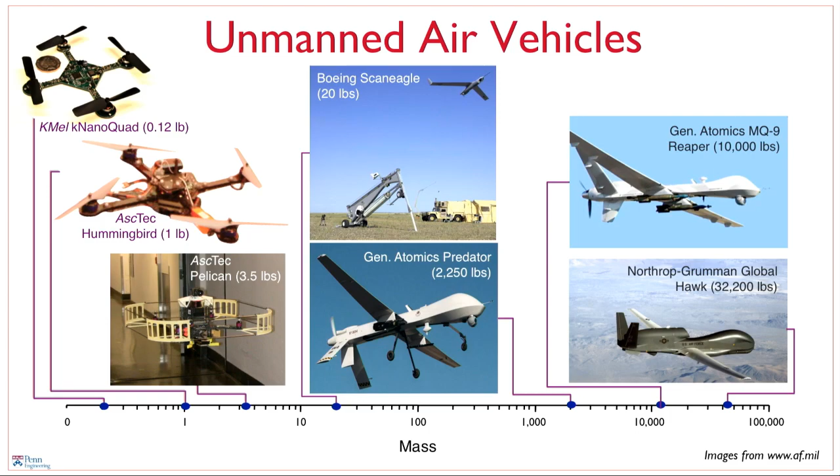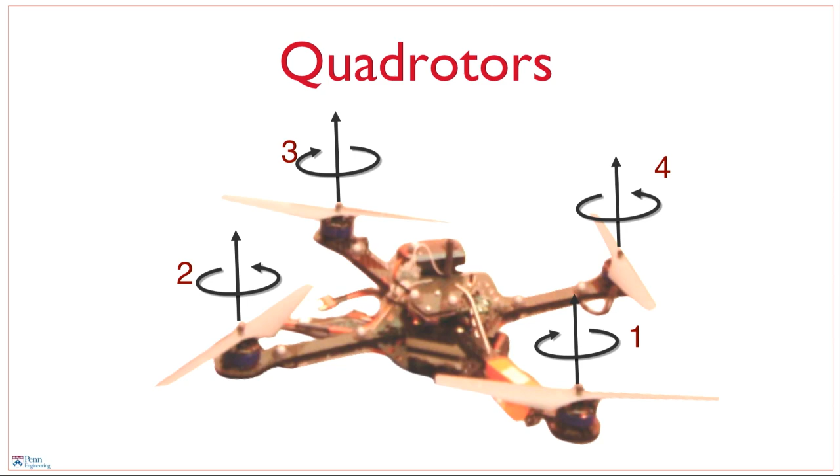All these robots on the left side are called quadrotors, because they're helicopters with 4 rotors. If you rotate all motors at some nominal speed, the lift generated by these rotors compensates for the weight and the robot hovers. On the other hand, if you carefully control these speeds, you can get the robot to roll, pitch, and yaw, and fly in whatever direction you want. The smallest robot we have weighs a little less than 75 grams, is about 21 centimeters in diameter, and consumes between 10 to 15 watts of power.

Robots like this can be used for emergency response applications. Imagine a 911 call in a building like this, and the first responders on the scene are robots. They gather information and provide it for human rescue workers who might come much later. They can also be used for search and rescue - these are pictures of our robots in Sendai, from experiments following the earthquake in March 2011. You can see their ability to fly in collapsed buildings, take pictures, and send information back to human rescue workers.

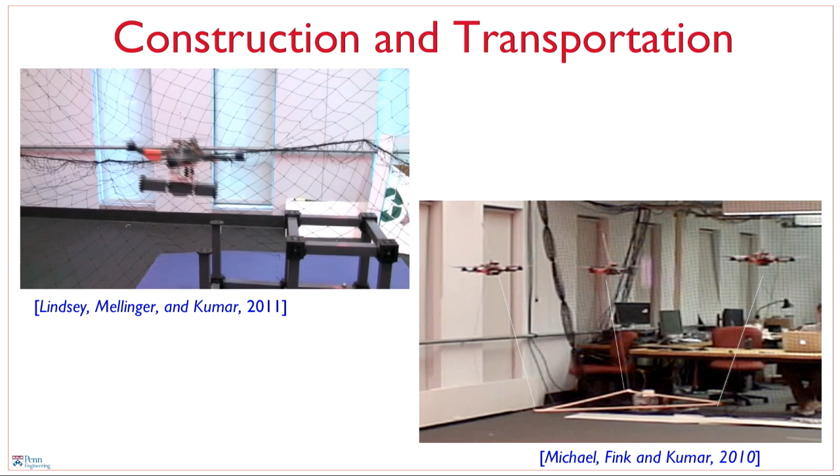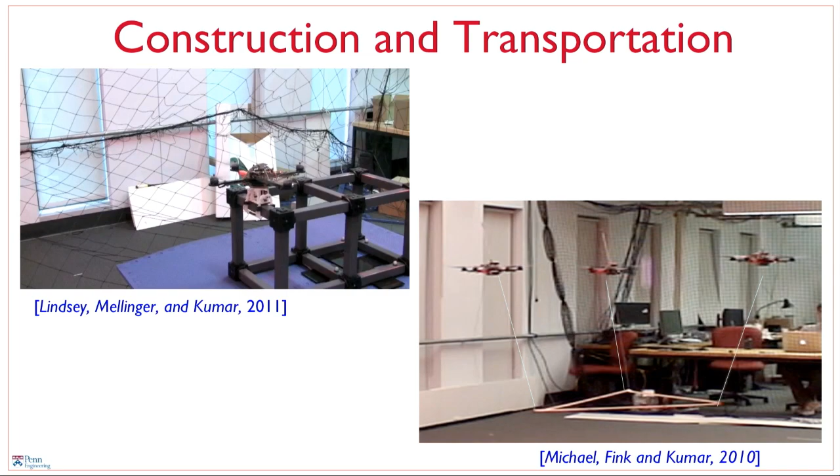You can also use these robots for construction and transportation. In the video on the top left, robots assemble truss-like elements with magnetic rods, forming 3-dimensional structures. This is only a laboratory prototype, but you can imagine bigger robots performing construction tasks on a larger scale, or even smaller robots, as you see on the bottom right. If you build smaller robots, the payload is going to be smaller, but you can get these robots to collaborate to pick up larger payloads.

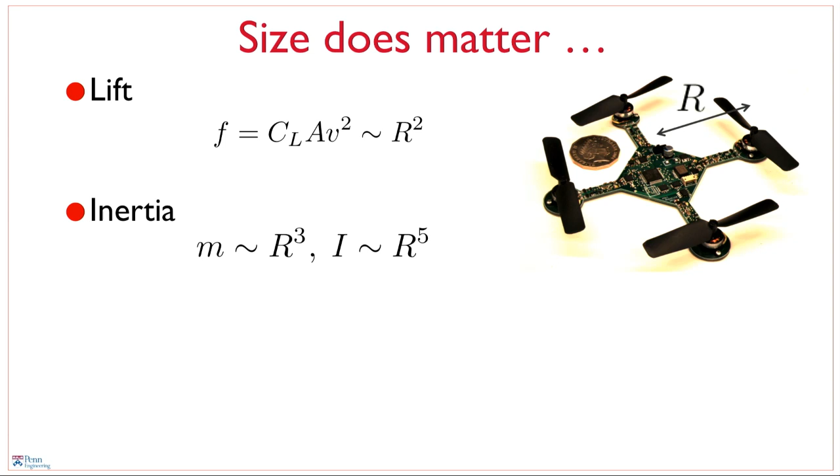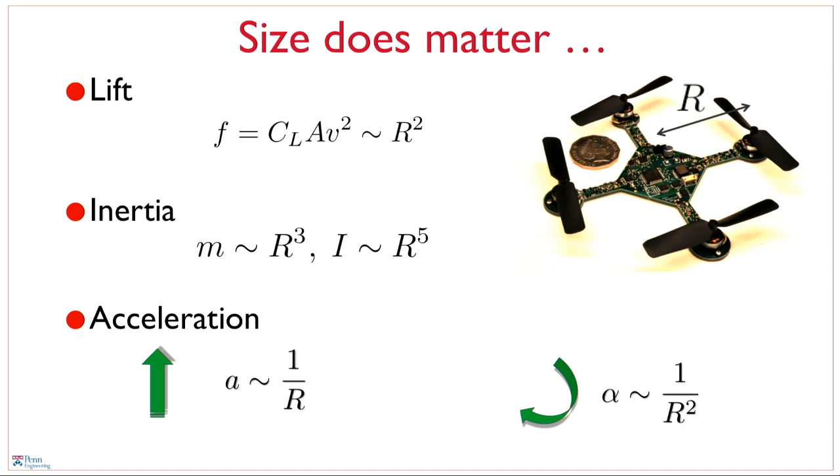Size does matter. If you take the characteristic length R of a robot - now I'm allowed to use mathematical symbols since we're all geeks here - we know that lift scales as the square of this length, but inertia also scales as powers of R. If you make R smaller, say by a factor of 2, the lift drops by a factor of 4, the mass drops by a factor of 8, and the inertia drops by a factor of 32. So when you compute the acceleration from scaling down, the linear acceleration actually increases - it goes as 1 over R - and the angular acceleration even more so, going as 1 over R squared. You get 4 times the angular acceleration as you scale down the length by a factor of 2. This works to our advantage: as we build smaller and smaller robots, those robots become more agile.

What you see in this video is one of our smallest robots doing flips, double flips. The single flip can be performed in half a second, and the robot accelerates from hover position to a maximum angular speed of 2,000 degrees per second in less than a quarter of a second.

All this is possible because an onboard computer carefully monitors signals from an onboard gyro and accelerometers to stabilize the aircraft to hover. One of the co-inventors, Daniel Mellinger, throws this robot into the air, and you can see this robot recover no matter what position it's in and return back to him safely.

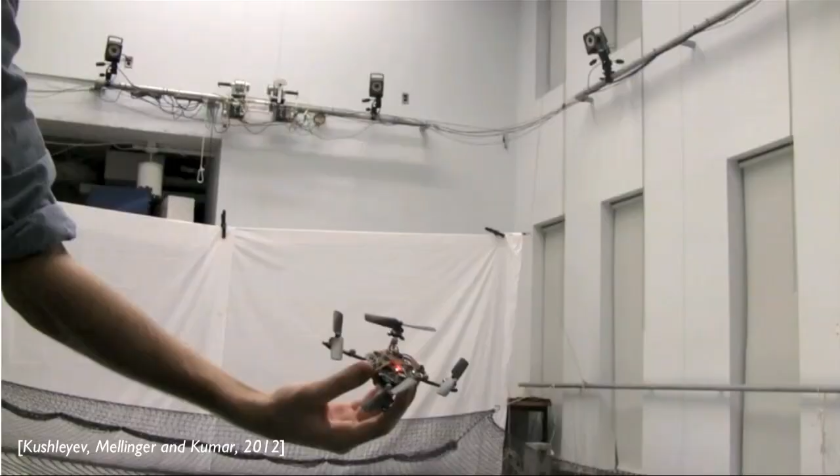We want to take robots like this and make them autonomous. A key issue you have to deal with is motion planning or path planning: how do you get from point A to point B? Here's a schematic showing a 12-dimensional picture, which I can't really draw. But the idea is that if you look at the dynamics of a robot like this, it's complicated, can only be described in a 12-dimensional space, and further, this space is curved. It's curved because when you write down the equations of motion, they have all kinds of nonlinearities.

What we have to do is plan motions for this in real time. If you consider going from point A to point B, and you want to perform all these computations on onboard processors, this is quite hard. So there's a trick that allows us to transform this 12-dimensional space into a flat 4-dimensional space. In that 4-dimensional space, all you have to worry about is the position x, y, and z, and the yaw angle. If you can find sufficiently smooth trajectories in this 4-dimensional space that avoid obstacles, it's possible to transform that back to the 12-dimensional space. This is the trick our robots use to plan motions in real time.

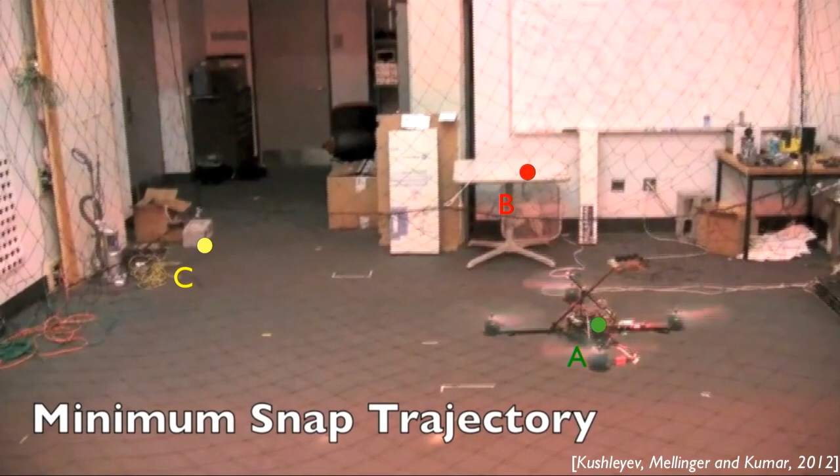What I want to show you is some examples of experiments using this strategy. In the first video, you'll see this robot going from point A to point B through an intermediate waypoint C. The trajectory planned is aggressive. It starts from a hover position, and you can see the rolling followed by the pitching, which it has to do to stop. In this flat space, it's pretty easy to find these trajectories, but when you transform it back, you get trajectories like this. This is done autonomously.

The feedback is obtained from a motion capture system overhead that provides real-time information 100 times a second. But this planning is done at 20 hertz—20 times a second, you can calculate these minimum snap trajectories, which are smooth trajectories that minimize the fourth derivative of position to find the right paths.

Another thing you can do is have them go through obstacles. The robot knows precisely where the obstacles are because of the motion capture system, and it plans paths through these obstacles with remarkable precision. It doesn't matter if these obstacles are moving—as long as it can predict the motion of the obstacle, the robot can plan paths through them, again in real time.

It gives you a new appreciation of the phrase jumping through hoops, doesn't it?

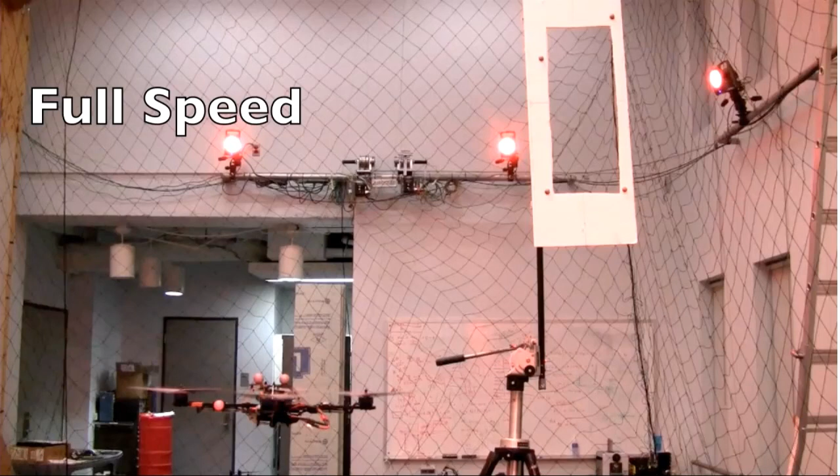I want to show you another clip where the robot is confronted with a window that's only 3 inches wider than the robot's height. What you have to do here is take examples of trajectories you've learned before and stitch them together. I want you to compare this exercise to what an Olympic diver has to do when she jumps off a springboard to gain energy, then twists her body into the somersault, and then recovers gracefully.

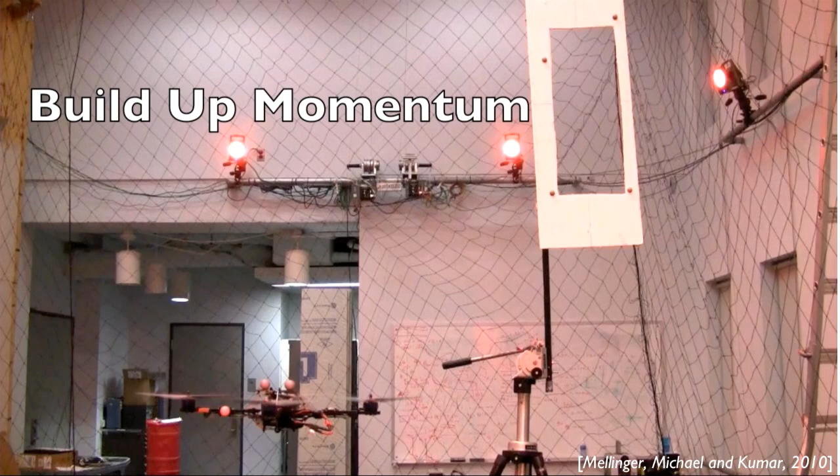What this robot does is start from a hover position, then twist its body to go through this window, and then recover. There are four distinct phases integrated together: building up momentum, changing orientation, reversing orientation, and then switching back to hover. These trajectories are stitched seamlessly in real time in response to obstacles that are confronted.

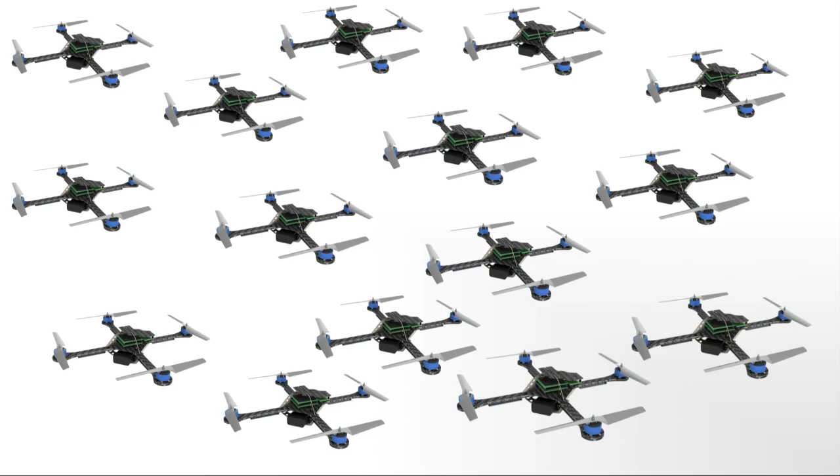I want to switch gears a little bit and talk about one of the limitations of scaling down, which is really this issue of size. What we really want to do is get lots and lots of robots to collaborate if you want to carry payloads. Now, these payloads might be objects that you want to transport, or sensors that you might want to use to map the environment. Cooperation is a fundamental aspect of all of this.

There are 3 things that I'll submit to you that are similar to ants, these birds, and to our robots if we have to make them cooperate. First, they operate just based on local information. It is not possible—there are 4,500 people here. I guarantee you that the person at this extreme doesn't know what the person at the other extreme is doing. So you have to act based on local information.

Secondly, you have to act independently. There's no one who's going to tell you exactly what to do in order to accomplish this cooperative task. And then finally, there's got to be this notion of anonymity. What I mean by that is an individual has to be agnostic to who her neighbor is. That's very important if you want to perform a collaborative task. So the ants have no identities. The robots don't care which robot is next to each other.

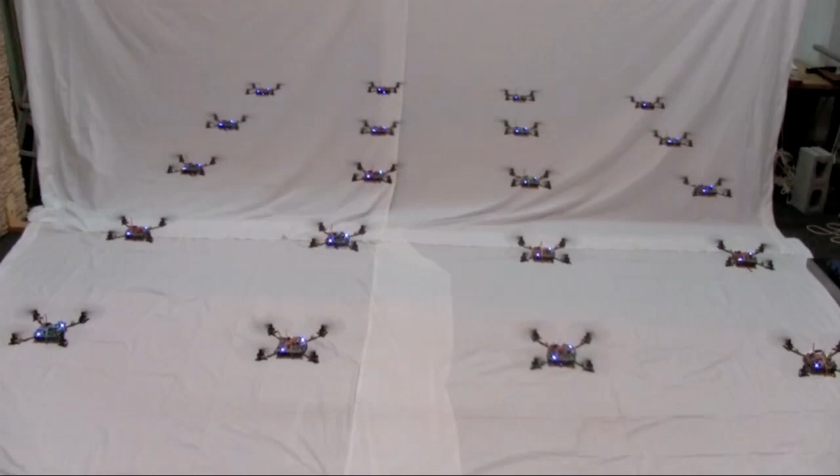I want to show you a video that we've just created. This was about 6 months ago, which shows the biggest indoor swarm that we've managed to create. These are the really small robots that I told you about. There are 20 of these flying in formation. They're all aware of their neighbors. They all solve this problem of going from A to B, but they're told by the human operator to create these formations.

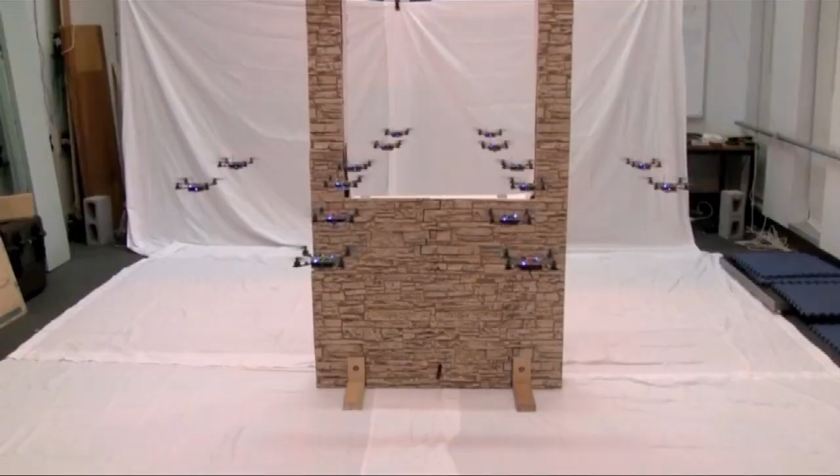These robots create these formations in a safe way, keeping track of their neighbors. These formations can be 2-dimensional, 3-dimensional. They can change dynamically to go through obstacles. And again, the control has to be very, very precise, as you see in this video, where they traverse a figure-8 pattern.

These robots come within inches of each other, and you can imagine the level of precision that's required because they're buffeted by the aerodynamics of their neighboring vehicles because of the downwash from the rotors. So this is an example where the robots are just creating formations. It makes for a cool video.

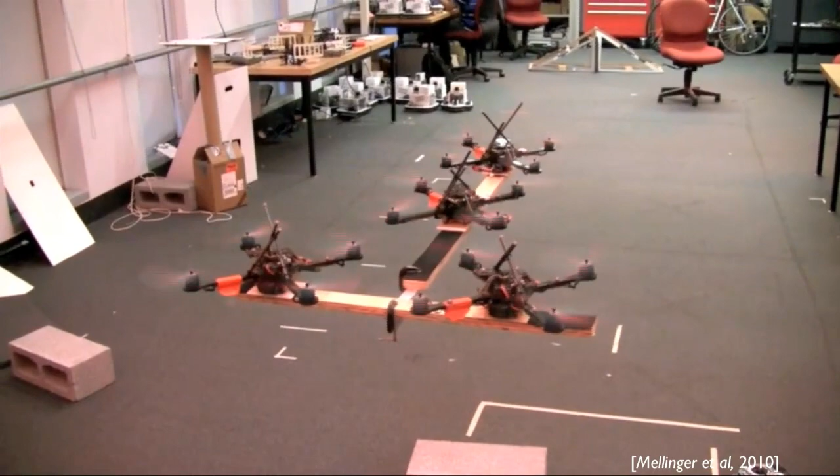But what we'd really like to do is to get them to collaborate to carry objects. And so here you see teams of 4 robots carrying payloads that individuals simply could not have carried. Now here there's a disadvantage: you can see if you group many robots together and have them carry one big payload, the overall inertia of the system actually increases and the maneuverability decreases. But what you gain here is, again, the ability to carry larger payloads.

Here you see these robots actually collaborating on identifying a piece of a 2x4 and then figuring out how to grasp it. These are grippers made out of composites with inlaid fish hooks, which allow you to sort of dig into these 2x4s to pick it up, and they're able to move.

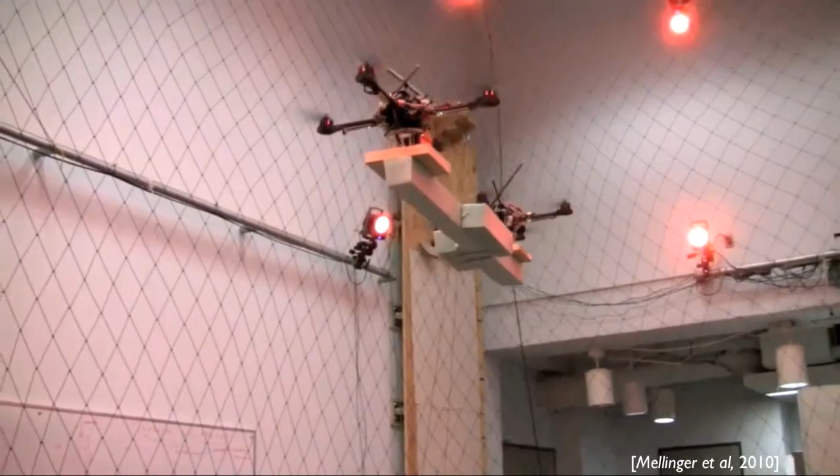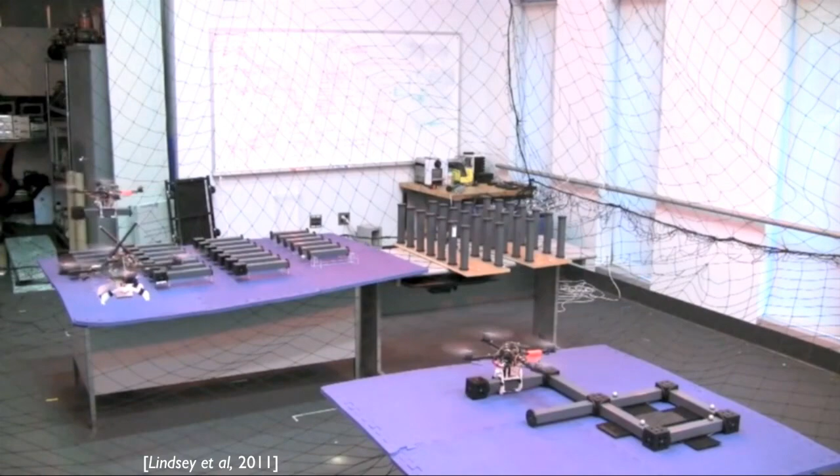The next example I want to show you is an example of construction. So here there are 3 robots that are assembling structures based on blueprints that look roughly like what you see in a Lego instruction booklet. The robots are told what the pattern needs to look like, the 3-dimensional structure. The robots decide which robot is going to pick up what part and assemble it where.

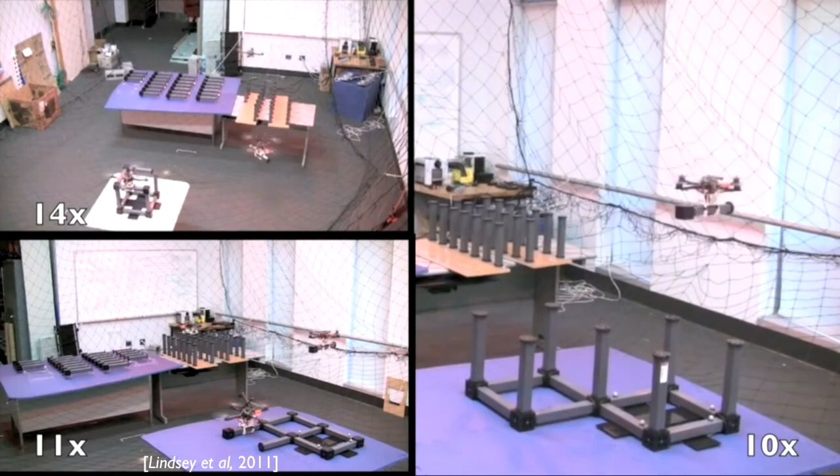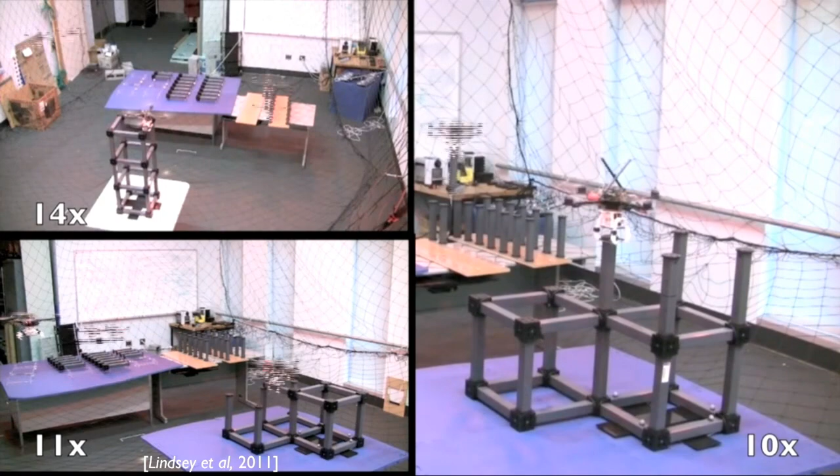And here you see, fast forward, 3 experiments where the robots essentially build 3 different 3-dimensional structures. Again, the high-level specification is very simple, but the robots make all these decisions on their own in order to satisfy that high-level specification.

In all these videos, one of the things you would have noticed is this network of motion capture cameras. This makes for a very special piece of infrastructure, and if these robots have to leave the laboratory and go outside, it's hard to do. So we've been working on figuring out how to get rid of that infrastructure, how to eliminate the need for it. Here's our first attempt to do that.

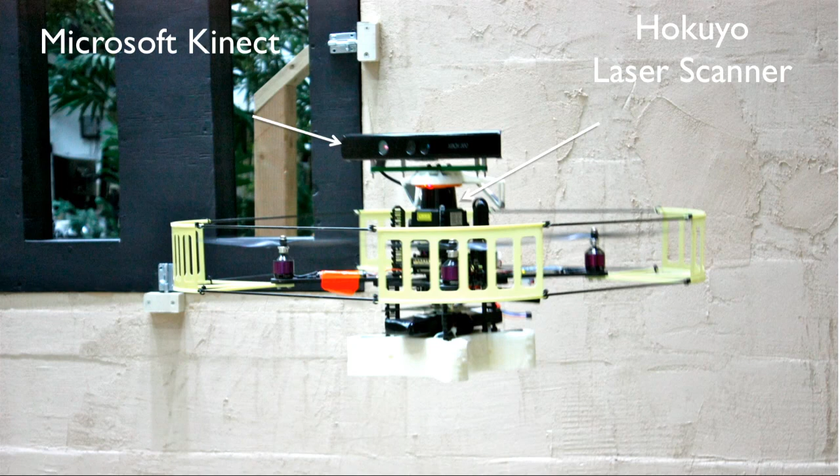This robot has two pieces of hardware. One is a laser scanner that produces a 2D cloud of points at a 270-degree field of view out to about 30 meters. The second is an off-the-shelf Microsoft Kinect RGB depth camera, good between 3 and 5 meters out with a 40 degree field of view.

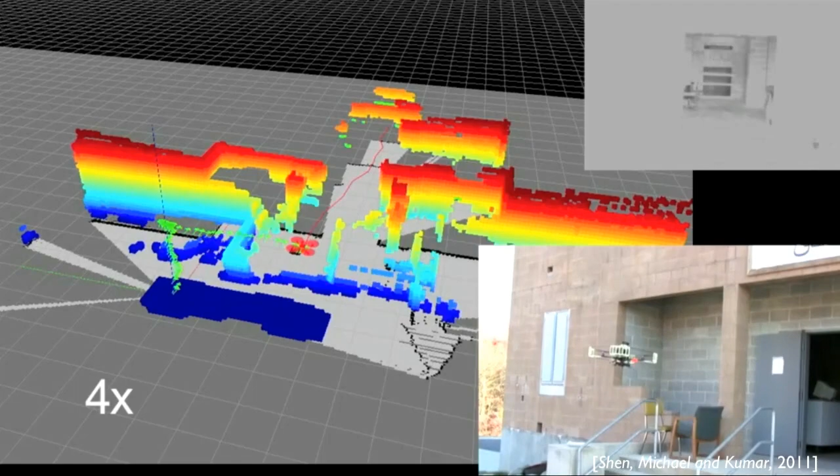Using both sensors, the robot can start distinguishing features in the environment and triangulating off those features. This allows the robot to localize, as I'll show you in this video, where the robot takes off outside a building it's never seen before. It builds this map that you see on the left-hand side, which is a collection of all the features it sees, and it's triangulating its position with respect to these features 100 times a second.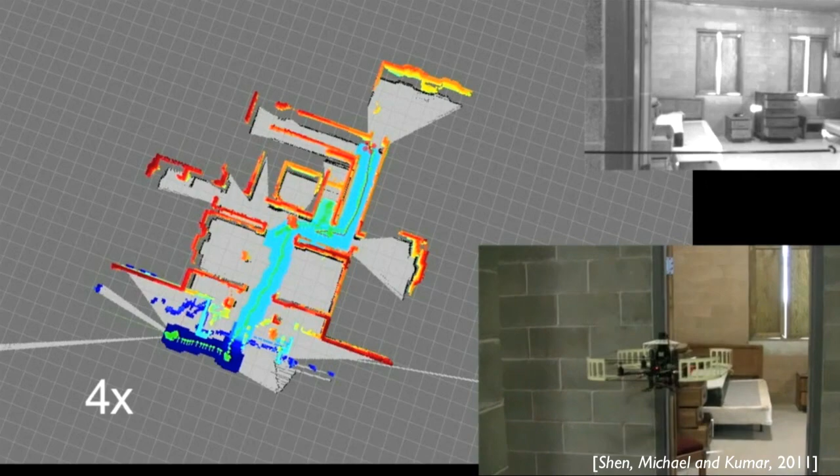So those motion capture cameras are gone, but the onboard cameras provide roughly the same information. I say roughly because these robots don't have access to a global coordinate system like GPS or our motion capture camera system. What they have to do is triangulate with respect to features they've located, so they have a relative sense of how fast they're moving. But as you can see here, this robot is completely autonomous.

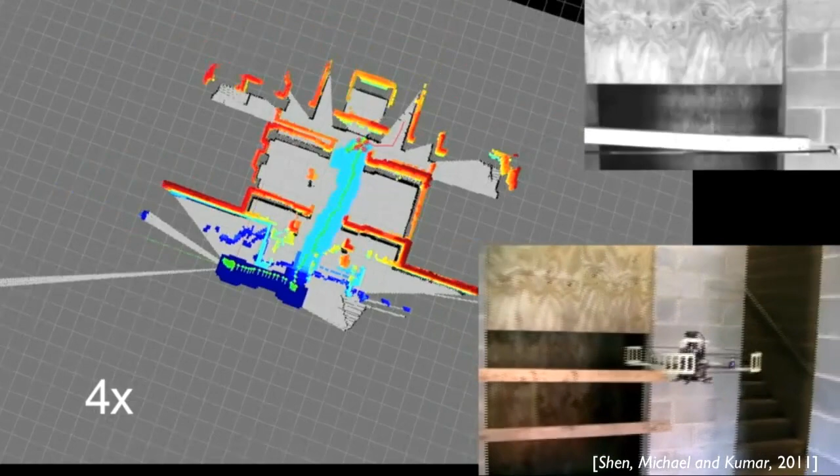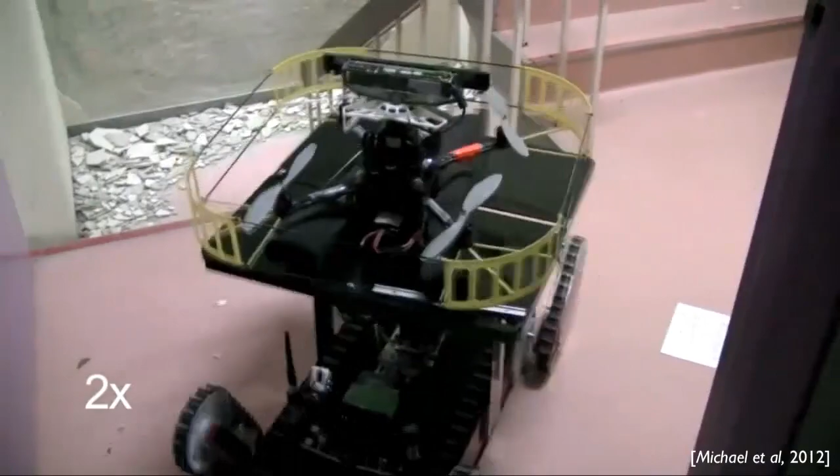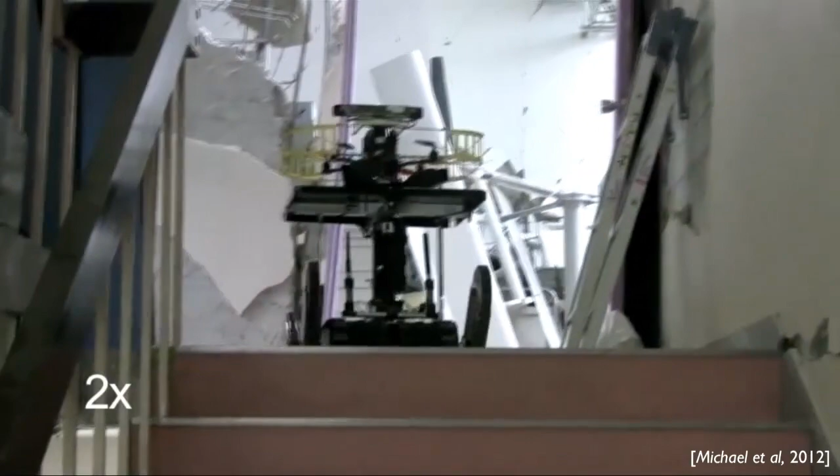So we've used robots like this. As I told you, shortly after the earthquake, we went to Fukushima and Sendai, and this is an early experiment we did in one of the collapsed buildings, in collaboration with our collaborators at Tohoku University. They created this ground robot, and the reason our robot is hitching a ride is because it's programmed to be lazy, just like humans. The reason for that is simple: it's about the limitations of the batteries we carry. Because we want to extend the mission life, the robot hitches a ride whenever it can.

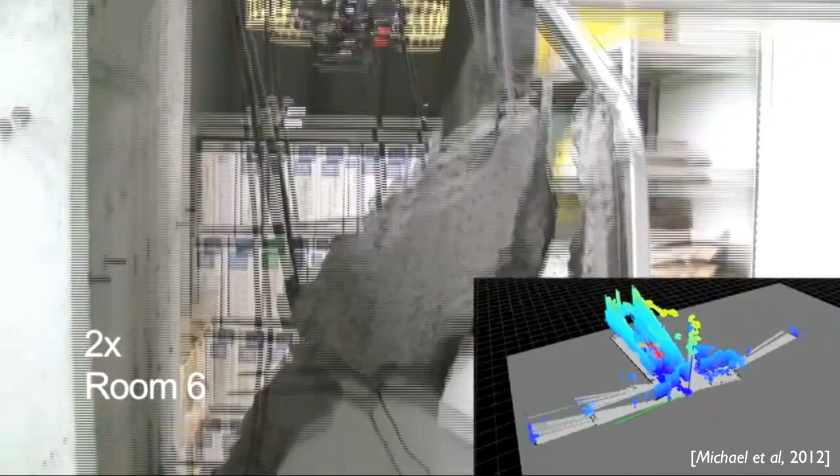Here you can see it's confronted by this obstacle. The ground robot cannot proceed any further, so it releases our aerial robot. The aerial robot goes in over this bookshelf, which is impossible for a human to actually go across, through this buckled doorway, and it's able to recover this three-dimensional information. It integrates this information with what the ground robot has, allowing this air-ground collaboration between two very different types of robots.

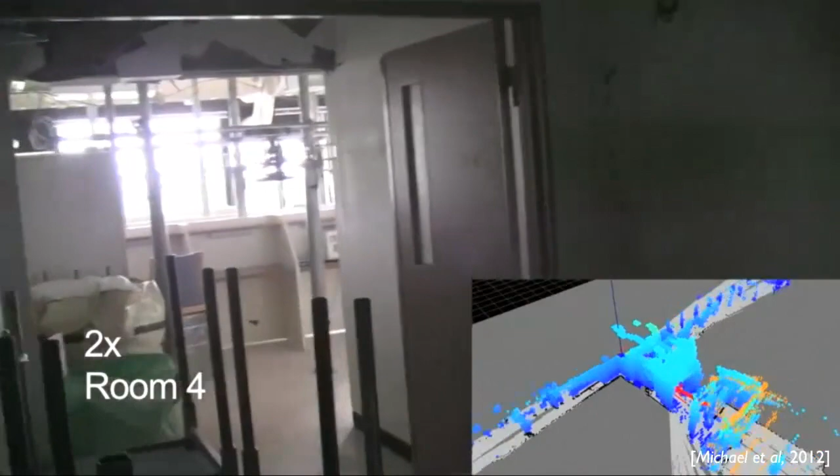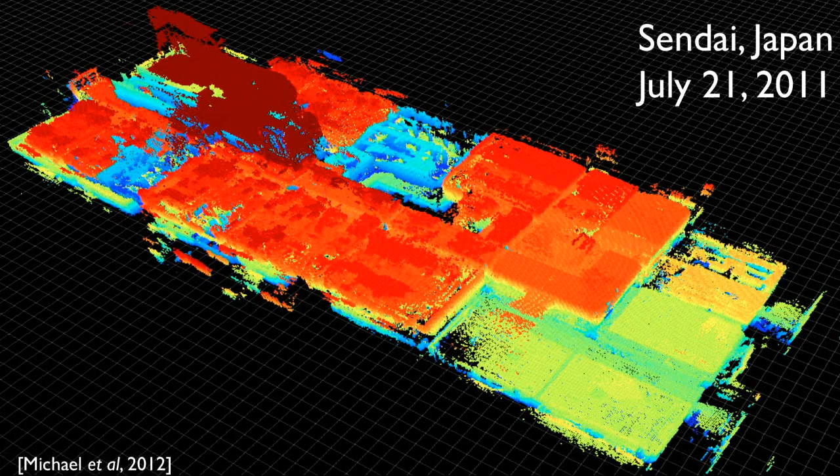To give you a quick idea of a mapping experiment we did, this is the 7th, 8th, and what remains of the 9th floor of a building at Tohoku University in Sendai. This was done four months after the earthquake, and you can see the robots have collected all this information and integrated it into a map. Now, this map may not be easy for you or I to visualize, but remember that if you wanted more information, you could actually get it from the robots, which have access to even more information than you see here.

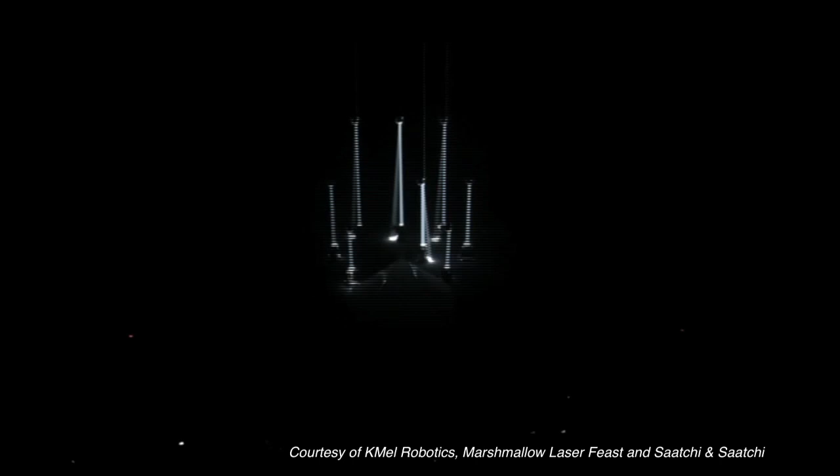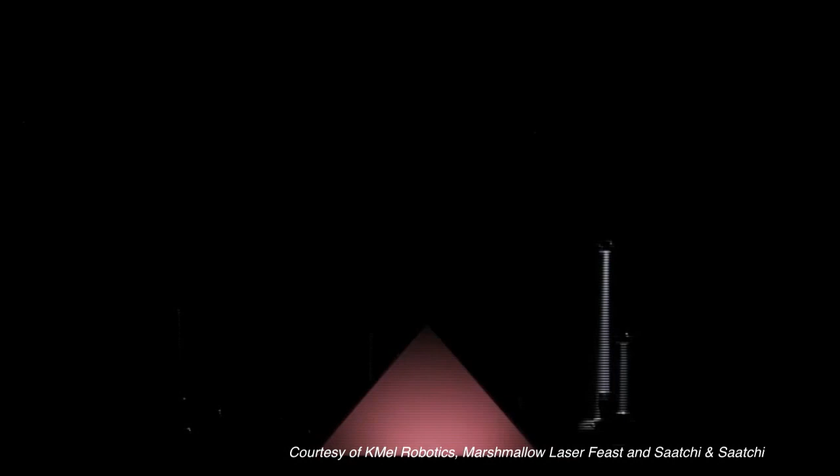One other thing I really wanted to talk about is the ability to bring together aerial robot technology along with music and lights, which really lends itself to new art forms. This is not my work or our lab's work, but my former students who have now established a company, KMel Robotics, did this performance at a Saatchi & Saatchi marketing event. What you see here is 16 of their robots coordinated with laser lights, 16 different actuators, all synchronized perfectly and choreographed to music. Art forms like this are now being enabled by a really cool mix of technology and music, and I think we'll see a lot more of this in the years to come.

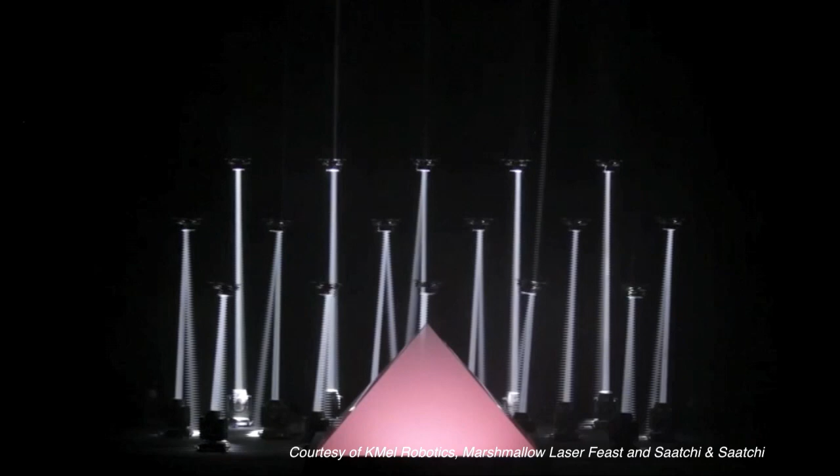Next, what I really want to do is show you the coolest video I have, and it behooves us to show it here, the coolest conference I've been to in my 50 years. This is the James Bond theme song, celebrating 50 years of James Bond. Let's watch 9 quadrotors playing the theme song, and I'm going to shut up and let you listen.

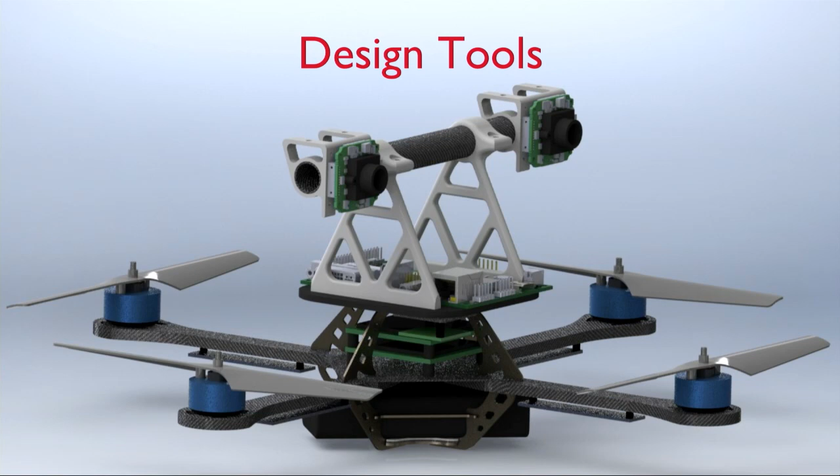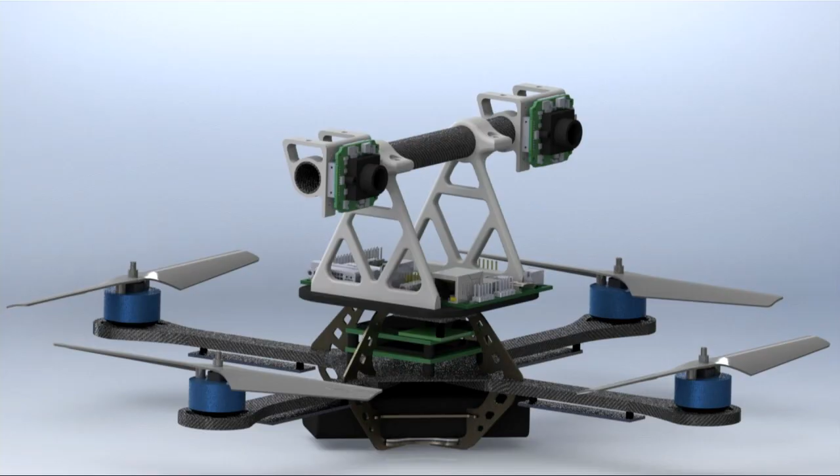I think this is the largest group of talented designers, and I would be remiss in not pointing out the important role that 3D CAD design tools like SolidWorks play. We use SolidWorks for all our designs, for creating, for modeling. We use it to model the frame, the motors, the boards, the processors, even the heat sinks, and finally the cameras. The reason we want to do this is because we're not only interested in the geometry, but also the mass, the distribution, the inertia, and ultimately understanding dynamic performance.

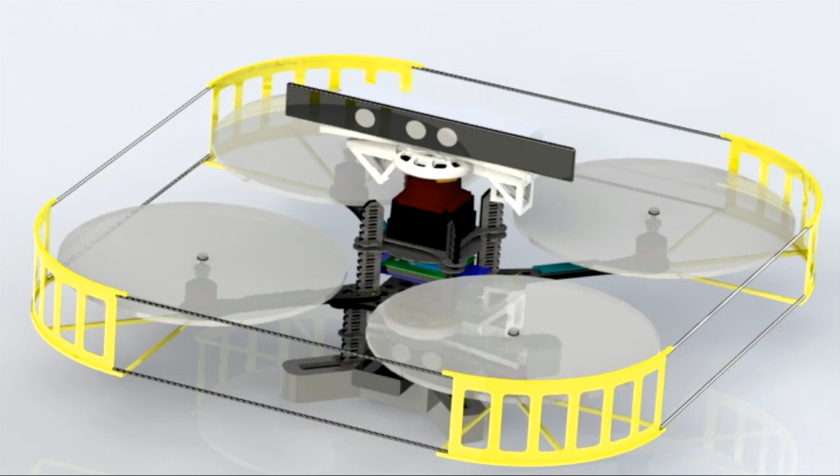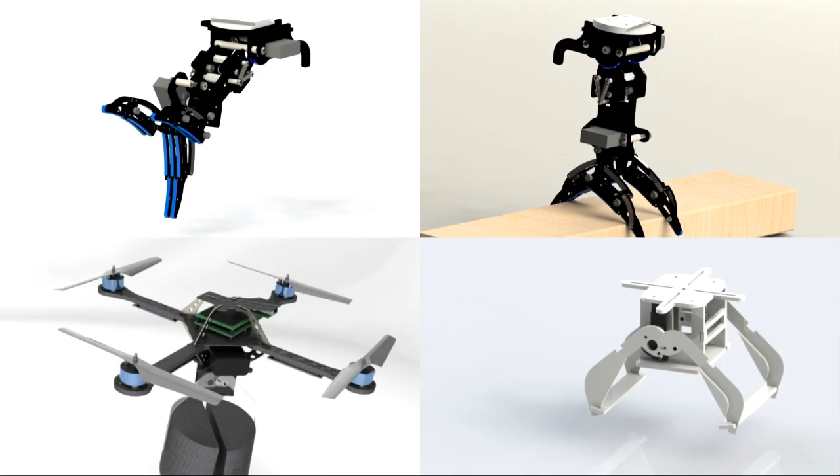We test different configurations. This one has a larger frame, a camera, and a laser rangefinder. This one is the one that I showed you, the Kinect 3D depth camera, and the cage, which is important because that's the only thing that protects our fingers. We explore 3D printed frames, try different motors, and model details down to that little switch you see on the bottom left. We look at accessories, whether we can actually integrate things with our quadrotors, like these grippers.

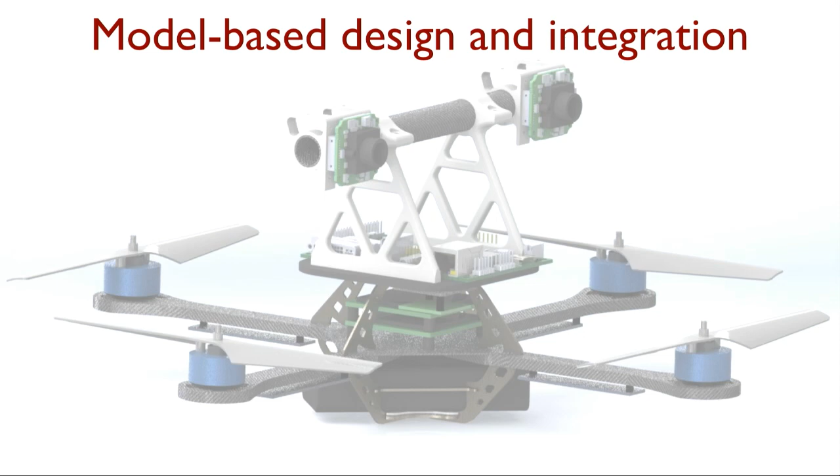Model-based design tools, such as SolidWorks, play a key role in systems integration and development. But a key challenge, to me at least, is the co-design of software and hardware. Whether it be electrical or mechanical hardware, we know the value added by software is significant, and more importantly, the fraction of a product's value attributable to software is steadily increasing. This is true even in cars and airplanes, not just robots. In all these applications, sometimes it's hard to separate hardware design from software design. So I think there are at least 3 challenges for people like us.

The first challenge, I think we're already addressing, is creating the infrastructure for innovation—that's what this conference is all about. Second, a big challenge for robotics, and certainly all kinds of cyber-physical systems—cars, airplanes, even medical devices—is this co-design of hardware and software. And third, which may be the hardest challenge for us to address, is really making these tools widely accessible, open architecture platforms and systems. I think this is a huge opportunity because it really changes the paradigm for innovation.

Instead of having 4,500 smart, talented people here, we can now have the whole world working on these problems. By doing this, we can lower the barrier to entry, increase the number of shots on goal, and truly accelerate the rate of innovation. I think this is the big thing for us going forward in robotics. Thank you.